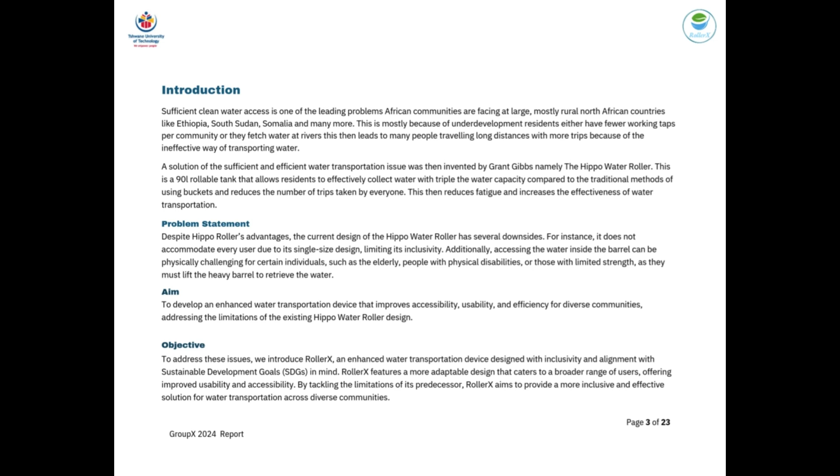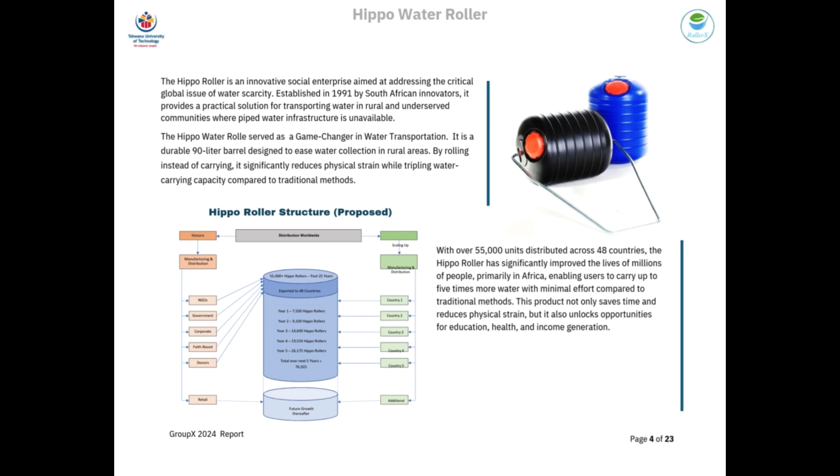The Hippo Water Roller has changed water collection in underserved rural areas. Its durable 90-liter rollable design reduces physical strain and enables users to transport 3 to 5 times more water than traditional methods. Over 55,000 units have been distributed across 48 countries, benefiting millions of people primarily in Africa.

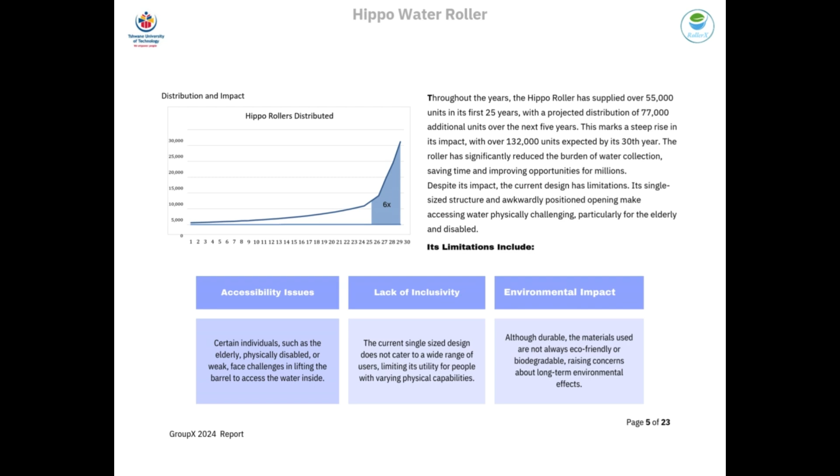The Hippo Water Roller has limitations, such as accessibility issues whereby elderly or physically disabled users struggle to access water due to the barrel's awkward opening. A lack of inclusivity, whereby the single-size design limits its use for individuals with varying physical capabilities. And environmental impact, whereby the materials are not fully eco-friendly or biodegradable, raising concerns about long-term environmental effects.

Introducing RollerX, an innovative solution for water transportation. RollerX represents a significant advancement over the traditional Hippo Water Roller, addressing its limitations while offering a more inclusive, efficient, and sustainable water transportation solution. With its user-centric design and cutting-edge materials, RollerX prioritizes accessibility, usability, and environmental sustainability, meeting the needs of diverse communities and supporting long-term ecological goals.

Key features and benefits include enhanced accessibility: the RollerX features a repositioned opening, eliminating the need to lift the barrel, and includes a built-in multi-layer filtration system for clean, hassle-free water retrieval. This is especially beneficial for users with physical limitations. Size variability: available in 3 sizes, RollerX accommodates users of varying physical capabilities, ensuring comfort and inclusivity for all.

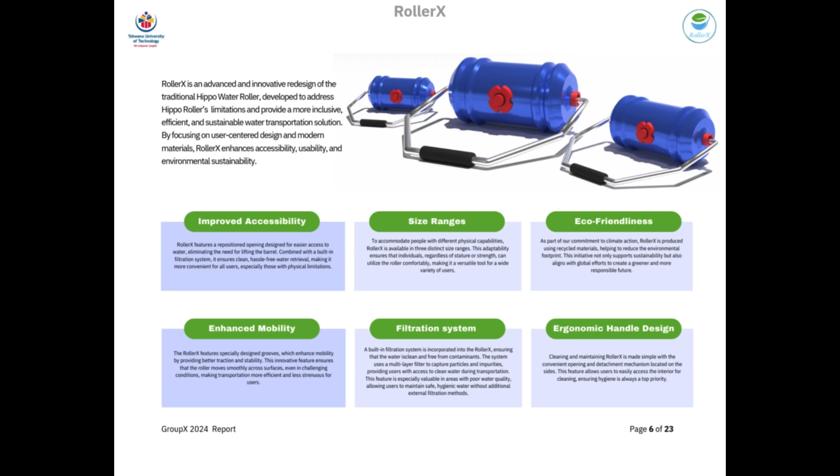The new design of the RollerX has been thoughtfully redesigned to tackle the limitations of the existing roller. The focus is on improving durability, ease of use, and sustainability while keeping inclusivity at the forefront. The barrel is designed to cater to a variety of needs, offering a range of sizes accommodating different tasks and user preferences.

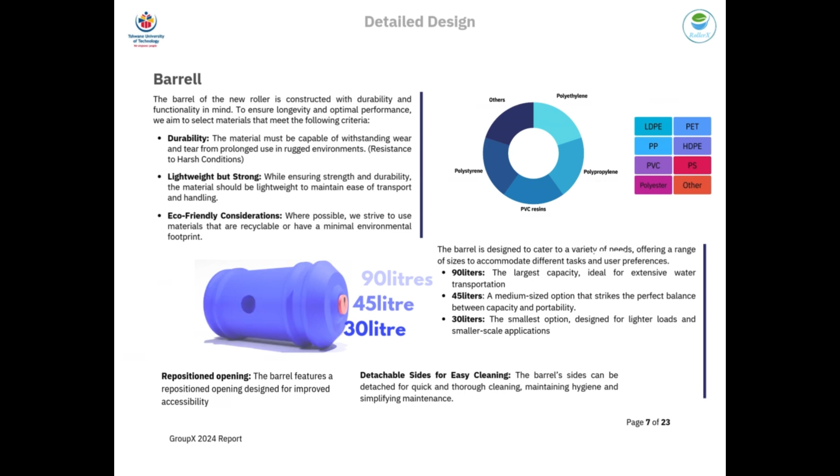The roller comes in 3 different sizes: a 90-liter roller, a 45-liter roller, and a 30-liter roller, which is the smallest option proposed. The new barrel features a repositioned opening for improved accessibility. It is also detachable on the sides, allowing it to be easily accessed for thorough cleaning and maintaining hygiene.

Moving on to the cap design. RollerX features a dual closure cap system for convenience and control. Its features include a large cap which allows users to fill or empty large volumes of water quickly, making it efficient for high demand scenarios.

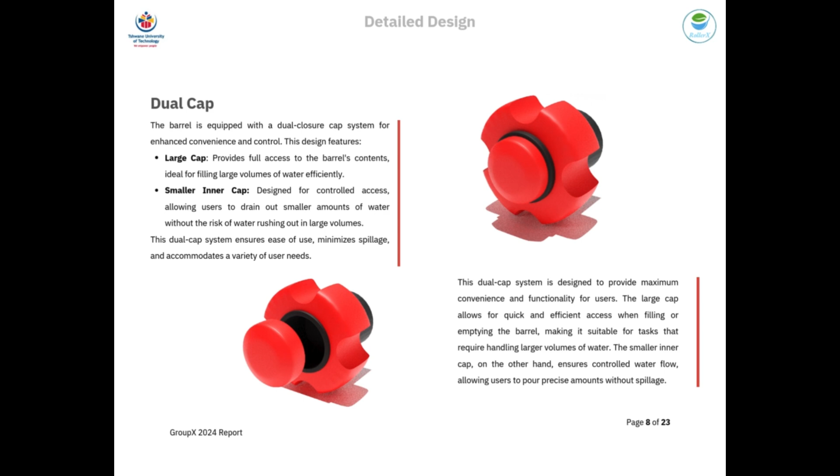It also features a smaller inner cap which is designed for more controlled access, allowing users to pour precise amounts of water, reducing spills and wastage. It is designed to maximize durability while addressing inclusivity and hygiene concerns.

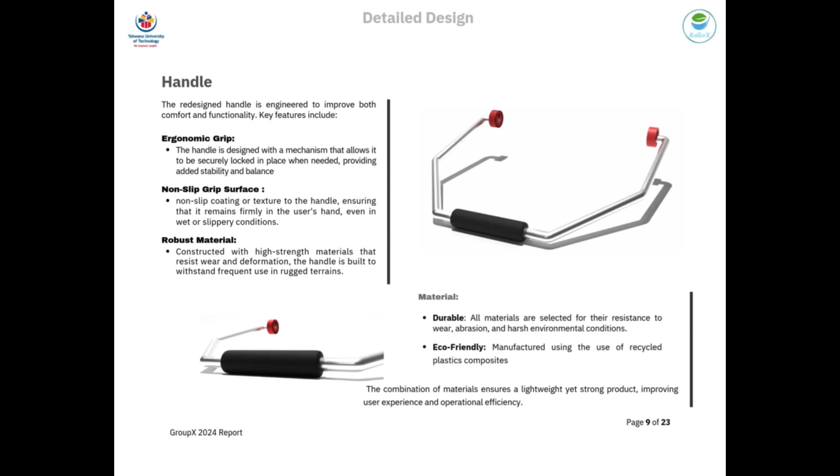The handle has been reimagined to enhance comfort, stability, and durability. Its features include an ergonomic grip, a non-slip grip surface which ensures safety even in wet or slippery conditions. It also has a locking mechanism, which provides added stability during use, especially on uneven terrain. The handle uses recycled plastic composite, aligning with the roller's commitment to sustainability.

Now, let's compare the materials used in the traditional Hippo Water Roller and the redesigned RollerX. The traditional roller primarily uses durable materials like high-density polyethylene and mild steel for strength. While effective, these materials are not so eco-friendly and rely heavily on virgin plastics.

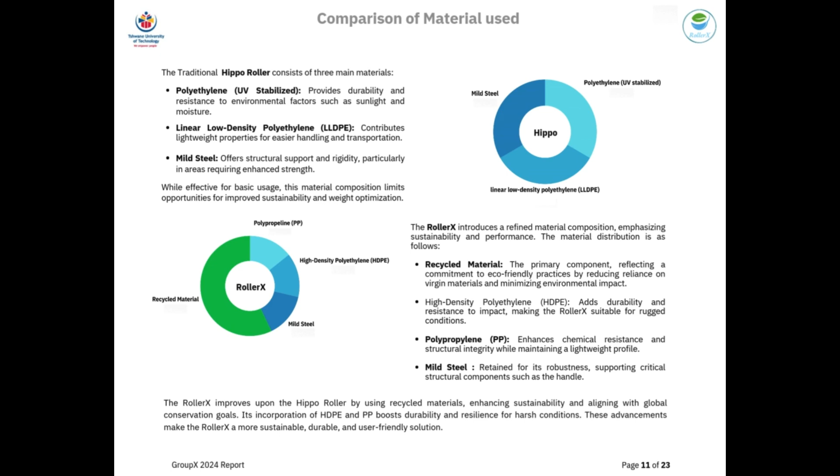RollerX introduces a more refined material composition, emphasizing performance and sustainability. By using recycled materials, RollerX aligns with global conservation goals. This not only enhances sustainability but also improves the roller's performance and longevity.

Moving on to the estimated costs, we have two tables detailing the total production cost breakdown and the rental costs. For overall production costs, the materials mentioned previously are expected to range about 440,000 rands, and the manufacturing costs are expected to range about 390,000 rands. The total production cost is expected to range about 910,000 rands, equivalent to 48,000 US dollars.

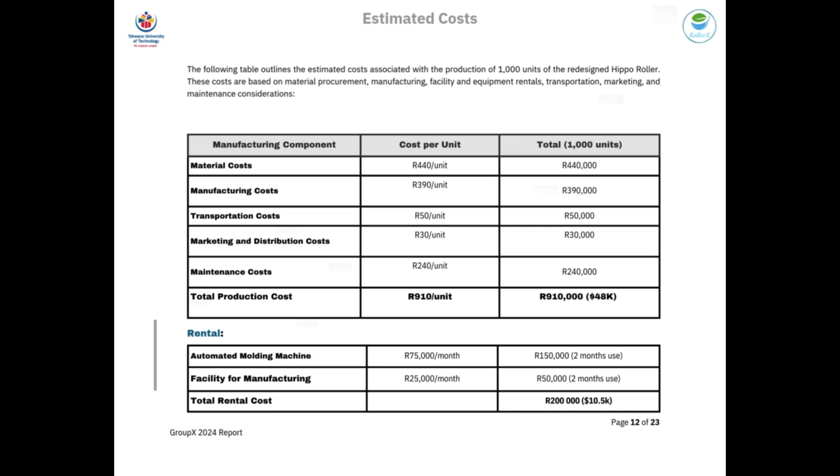On the other hand, the rental costs are expected to range about 100,000 rands per month. They include a facility which will be leased out and used for the manufacturing or production phase of the project. It also includes the rental of the automated molding machine, previously mentioned as the Arburg Allrounder 720.

For distribution, the product's design includes foldable handles and stackable barrels, allowing for efficient storage and transportation. By reducing shipping volumes, this innovation lowers fuel consumption and greenhouse gas emissions across the distribution chain, making logistics more sustainable. For usage, the product is engineered for long-term use, meaning customers don't need to replace it frequently.

At end of life, the EOL, the product is designed for easy disassembly at the end of its life cycle, enabling components to be recycled effectively.

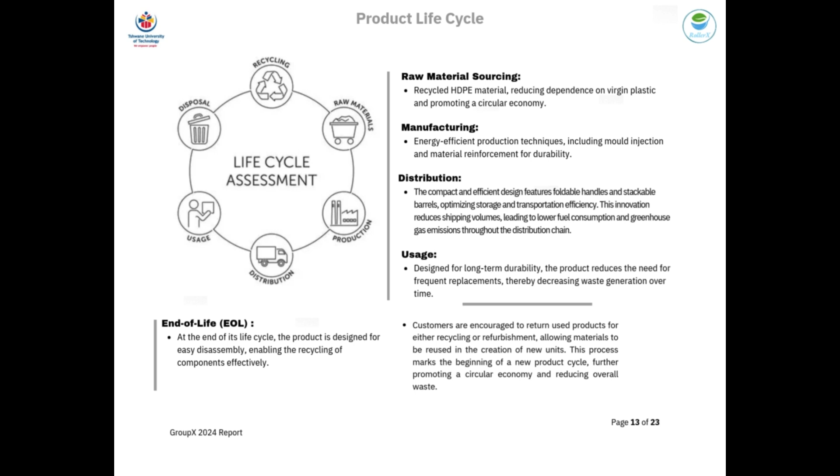We now move to production and productivity. For the manufacturing process, the product will be produced using an automated high-performance injection molding machine, known as the Arburg Allrounder 720, to ensure production rates are high and efficient. The setup time for the machine is around 30 minutes to 2 hours.

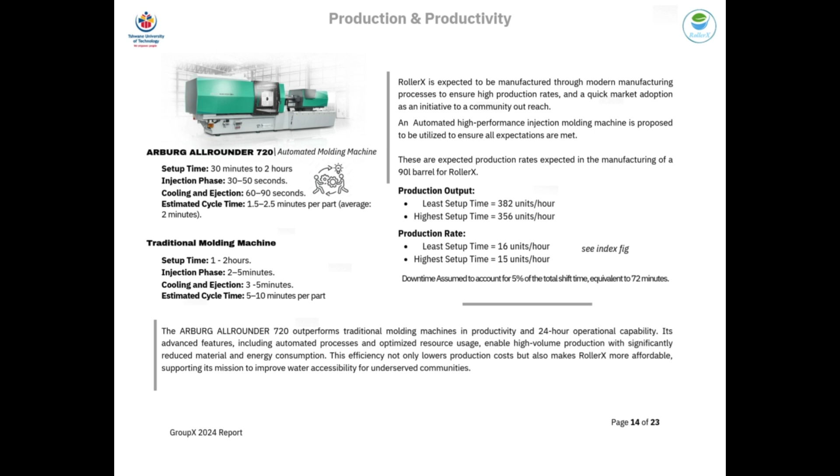The injection phase is from around 30 to 50 seconds, and cooling is 60 to 90 seconds. This machine, the Arburg Allrounder 720, improves productivity, energy efficiency, and reduces material waste. It also operates 24/7 with minimum downtime, approximately 5% of the total time, ensuring lower production costs and supporting accessibility for underserved communities.

Now, aligning our project with the SDGs, the project is in alignment with SDG 6, clean water and sanitation. It supports the UN Sustainable Development Goals of ensuring availability and sustainable management of water and sanitation for all. Our key focus is to improve water transportation efficiency for rural and water-scarce communities, reducing the physical burden and time spent on water collection, particularly for vulnerable groups. The main goal is to ensure availability and sustainable transportation of water.

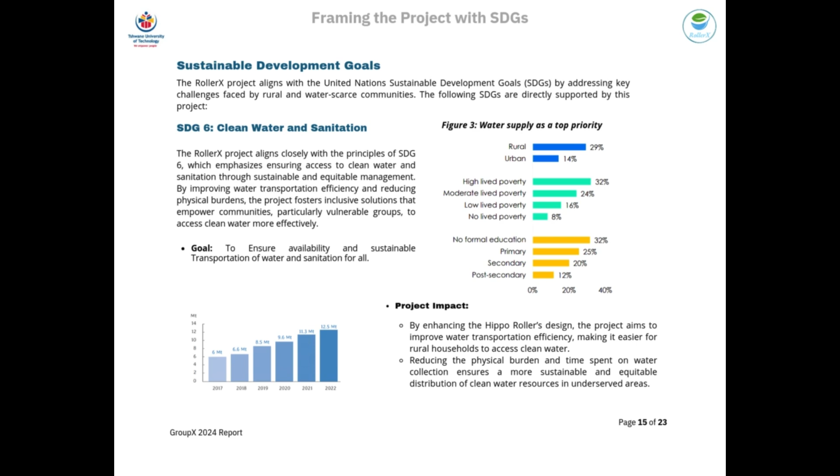This project also aligns with SDG 9, industry, innovation and infrastructure. The project offers sustainable industrialization through leveraging modern manufacturing processes such as 3D printing and automated injection molding to produce RollerX efficiently and sustainably. The key impact is to integrate advanced manufacturing methods and sustainable practices, creating scalable solutions that reduce environmental impact and improve accessibility, fostering inclusion.

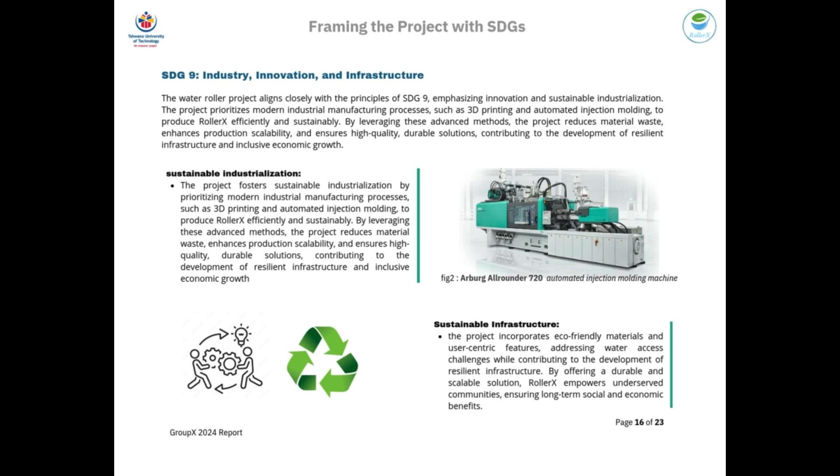It also aligns with SDG 13, climate action. The redesign of the Hippo Roller supports climate action by utilizing recycled materials and energy-efficient production processes, reducing environmental impact and CO2 emissions.

The impact of the recycled materials: they promote lower reliance on virgin plastics, reducing plastic waste and environmental pollution. They also support sustainable practices to decrease the demand for raw materials, thus mitigating landfill waste.

Progress of recycling: basing on South Africa, the percentage of recycled plastics increased from 15% in 2013 to 21% in 2023. The growth in recycled tonnage reflects national progress towards sustainability and reducing landfill waste. So the project contributes to climate action by scaling up sustainable solutions and reducing the environmental footprint of plastic products.

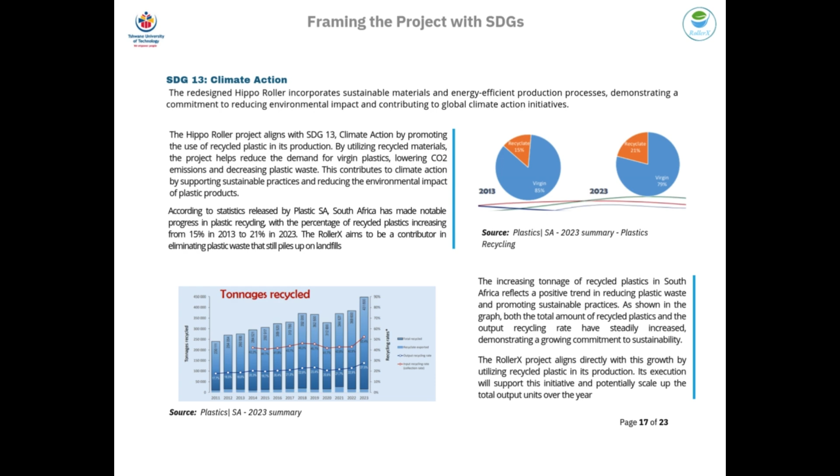Moving on to community focus and stakeholders. Our key stakeholders include our consumers, particularly women and children who usually carry water on a day-to-day basis. It also includes our community leaders and local organizations, manufacturers and suppliers, government policymakers, and our project team.

RollerX delivers an innovative solution to water transportation challenges, combining eco-friendly materials and inclusive design to improve lives in underserved communities. It supports sustainable social and economic growth by providing scalable and durable infrastructure, addressing environmental concerns and prioritizing accessibility. RollerX sets a new benchmark for resilient infrastructure that aligns with global sustainable development goals.

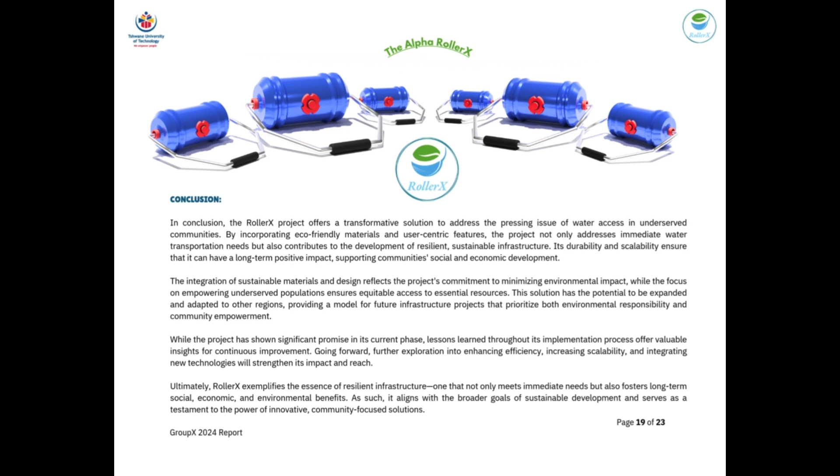With further enhancement and wider implementation, RollerX has the potential to revolutionize water access, fostering long-term community empowerment and environmental responsibility. It's not just a product, it's a catalyst for meaningful, sustainable change.